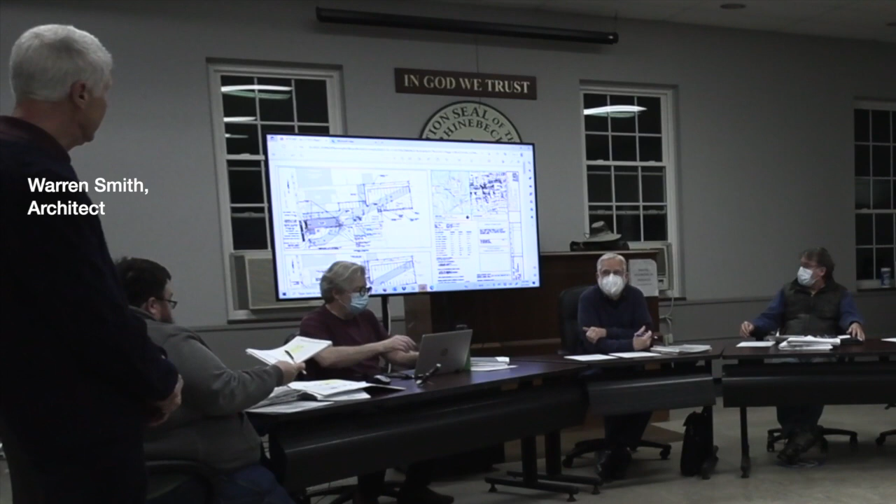But in general, this application for 6376 Mill Street, new construction, the building kind of across from the post office. Right now it's a vacant lot. Well, it's mostly vacant. There's a Chamber of Commerce little building right on the edge of it. But it's a lot with a lot of constraints. There are sewer easements for the village of Rhinebeck that run through. One I think is actively used. The other is an easement that may or may not be actively used. But nonetheless, we have to avoid constructing on top of those.

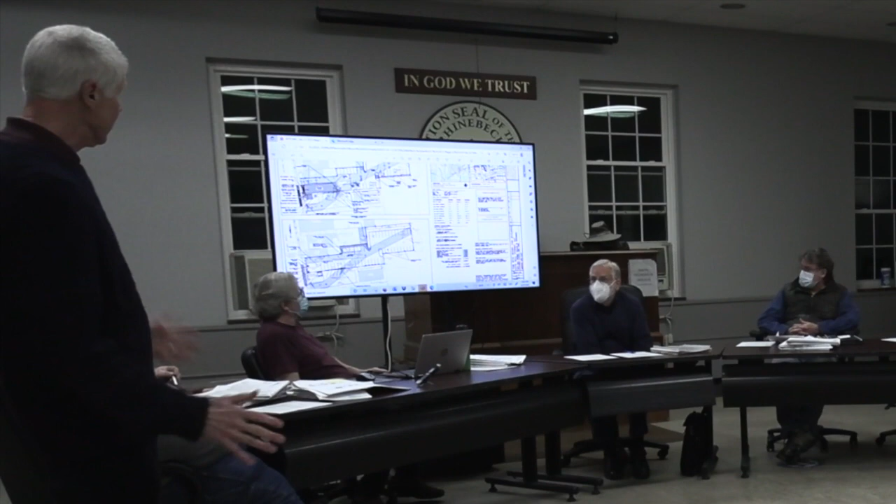So there's the shaded gray areas. It's a site that has the building that Frontier Communications has in the lower right there to the south. And just south of that is the Reformed Church and its cemetery. The site is low-lying. It's entirely parking, I guess, at this point, with the exception of the Chamber of Commerce kiosk. And it tends to collect a lot of water from neighboring properties. Some of it flows from the church property. Some of it appears to flow from the CVS property, but it sort of coalesces in that area. And there's just poor drainage.

There is a storm sewer in the street. And I don't believe there's much of a direct connection there. In fact, I think there's a couple of existing dry wells that Christian Paggi, PE, will talk about. Our proposal is to radically improve the retention of stormwater and drainage in the site, but also to build a building there. So the last time we were before the planning board, which was maybe a couple of years ago, the proposal was to put a small hotel, a boutique hotel, with retail on the front, facing Route 9, right where the bus stop is, fairly small retail space, and then at the back, entrance to an accessible hotel unit on the ground floor, and then on the two upper floors, accessed via stairs only, additional hotel units for a total of 9 hotel rooms.

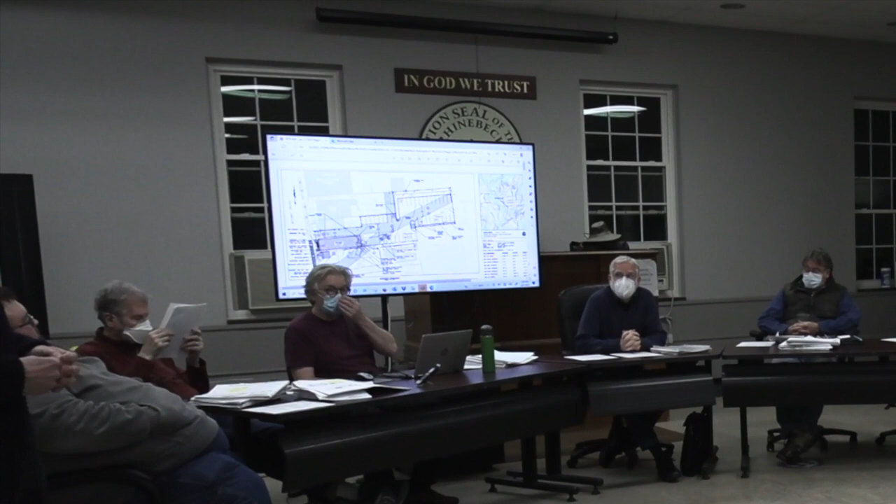The market for hotel rooms hasn't gone away, but the owners feel that apartments is a more critical demand here. And so the current proposal is to maintain, for the same footprint and the same basic design of the building, a retail area on the front, on Route 9, but to put in the back at the ground floor an accessible apartment, and then on the upper floors, 3 additional apartments, 2 on the second floor and 1 on the third floor, for a total of 4 apartments in the building. There's some minor adjustments to the window fenestration on the north and south sides, but really no change to the front of the building. Very minor tweaks to the back of the building.

Shall I bring the elevations? Sure, yeah, I might as well show those. The bulk of the issues that we've been working with, actually for the past year and a half, have been stormwater management and what to do with all the water that collects on the site. And again, Christian's been working very closely with the village consulting engineer, Tighe and Bond, to get that resolved.

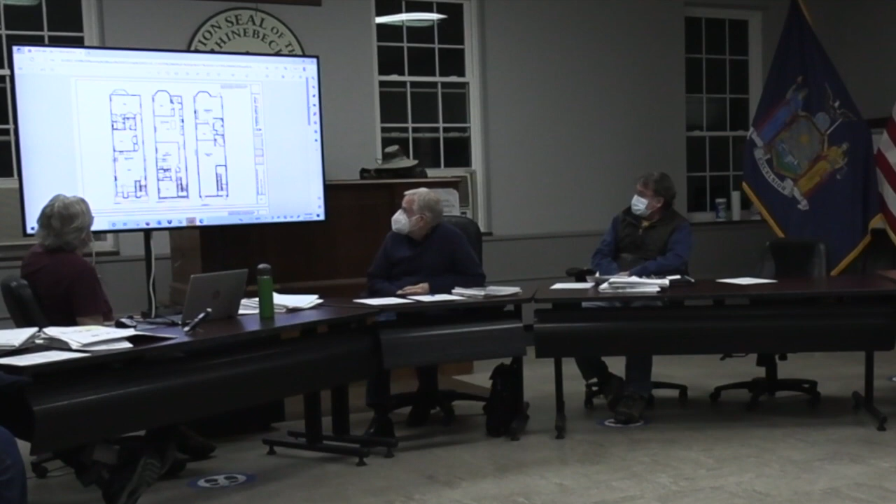These are floor plans for the building. On the right-hand side is the first floor, where there's an entrance to the retail space on the left and an entrance to a stair that goes up to the apartments on the right. The second floor has, again, 2 apartments, and the top floor has one 2-bedroom apartment. So that's within the footprint of the building as designed and approved a couple of years ago. Elevations are on the succeeding pages. That's the site plan again.

The elevations are in a different file. Oh, they're in a different file. They're in the file that had the plans and the floor plans. Amended site plan apartments says site plan. That's the letter. That's engineering details. There, okay, so if you just go down on that page, you were there. Oh, I was there? Okay. Yeah, it's just following pages in that same file. No, it's over the apartment set.

There you go. Okay, so yes, on the right is the street elevation, basically facing west, although the new one, did I send that to you, Ryan? Mm-hmm. The hub should have disappeared, and there's notes on there about the materials, which was a request at the last planning board. So this is not the most current file, but the building looks essentially the same. We pulled the double windows apart a little bit, which was a discussion in the last meeting. We relocated the grill for the PTAC unit for the top apartment on the right. But for the most part, it looks the same, except it's not being called the hub anymore, since its sign is not part of the application.

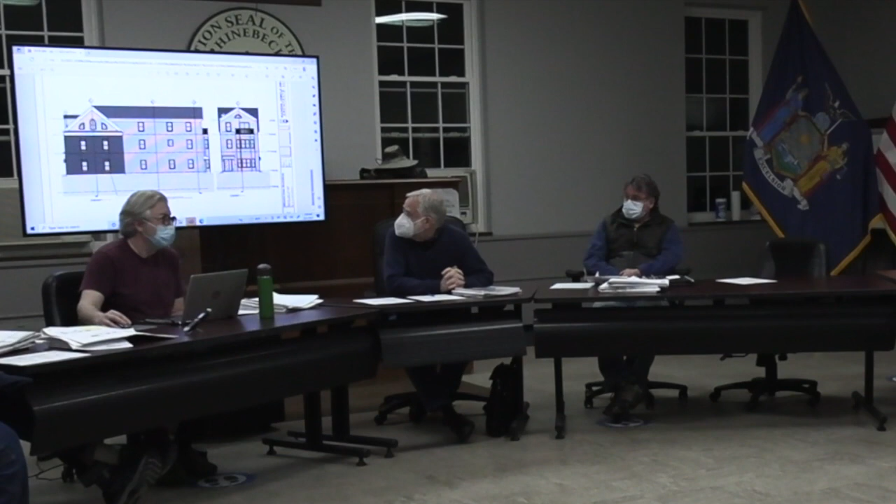If there are any questions about the design, there are some renderings too, which date from the previous iteration, but essentially are unchanged. But that's the substance of the architecture, and again, the site plan is simply changing it from hotel units to apartments. Do you have the renderings? Because that might be easier for people to understand. That might be in a different file. Different file. Was it in a prior meeting? No, they came in. Let me see. Did you have the renderings in the meeting of the 17th? We looked at them in that meeting. Okay, let's see. Apartment set, maybe.

Okay, yes, further down, that had some images. Again, that's the earlier plan set, but there is the rendering of the building from the street when it was still being planned for a hotel, but it's going to look almost entirely identical from the street, only the entrance on the right will be to the apartments rather than to the hotel upstairs. And that's a view looking up from the south, with the Chamber of Commerce building moved very slightly off the property line, so it can remain basically in place.

So, do you want to go over the engineering before we have public comments? Yeah, sure. Good evening, I'm Christian Paggi. Thank you, Warren. He pretty much covered most of the site plan elements. I'll run through the rest of them and some of the engineering. If you could pull the site plan up. Site plan? Yes, please. Just the application. No, that's not. So, again, the site plan is pretty much identical to the previously approved site plan.

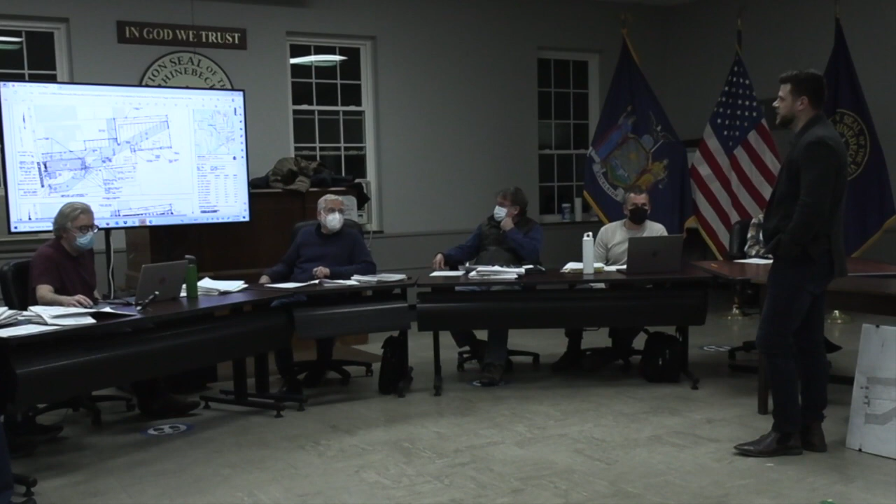We are also formalizing some of the parking stalls and bringing the stalls up to code as far as dimensions, and providing some new curbing to kind of straighten up and round off some of the existing edge of pavement. So if you're looking at the existing conditions plan compared to the proposed, you'll see that we're just adding a little bit of impervious in some of the areas just to formalize some of these parking areas that exist along that northerly side.

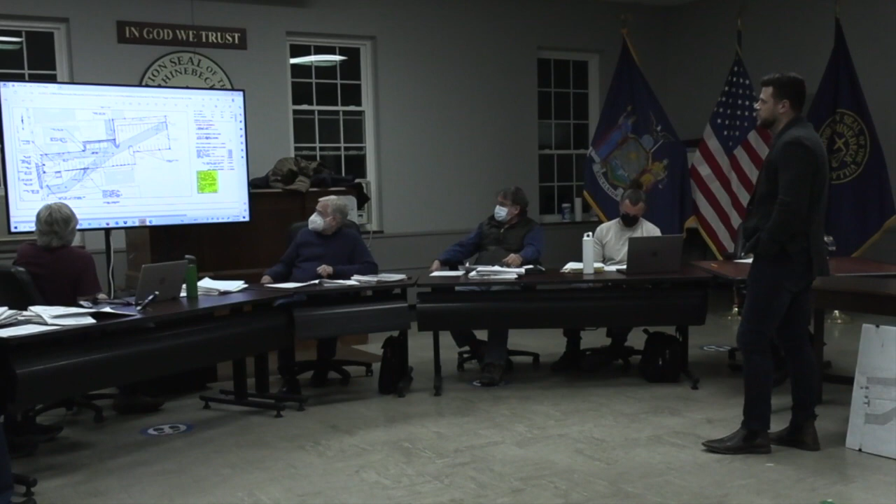As Warren mentioned, this gray shaded area shows the existing village sewer easement. That has dictated the location of the building as well as the stormwater improvements. If you want to go to the next, I believe sheet 3. One more. There we go. We are showing our proposed drainage, water, and sewer.

The building is proposed to be connected to the existing village sewer main that is located in that southerly easement area. The purple line is showing the building sewer line coming out to a new manhole and then connecting to the village sewer main. That will either be via a stub that's tapped into the sewer main. Tighe and Bond in their latest memo indicated they would prefer a doghouse manhole at that location, which is not a problem. Christian, is this the sewer? Yes, the purple area. Okay.

The blue line is the water. The water service, correct. And the water service is proposed just to be connected to an existing service stub. We met out there with the water department to verify that property is currently served by water. They believe it is, but we'll have to verify that also in the field.

Going to the drainage, the entire building is proposed to be collected via the roof leaders. You could stay back on that same one. We will likely collect the roof leader discharge with a manifold pipe around the building, and then discharge to that proposed catch basin 3, which is right in the center, and then direct all of that runoff to the rear. The rear of the lot currently experiences quite a bit of flooding, and that was referenced by Warren when he was walking through the site plan.

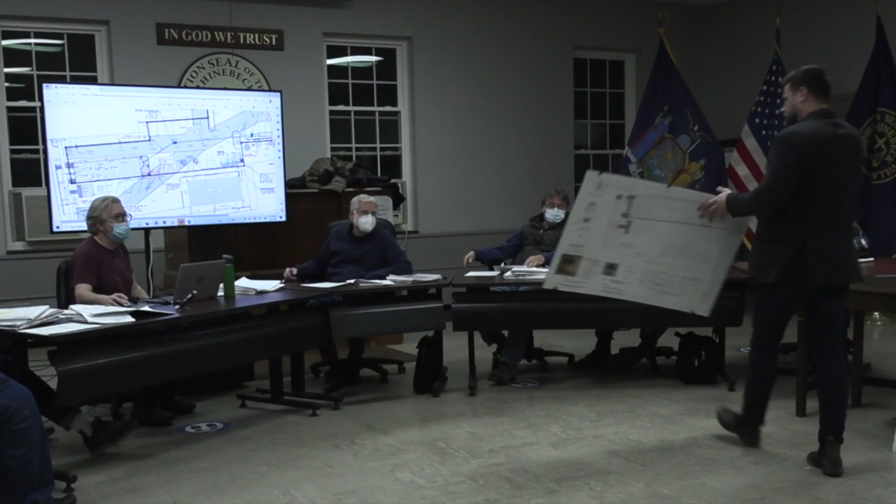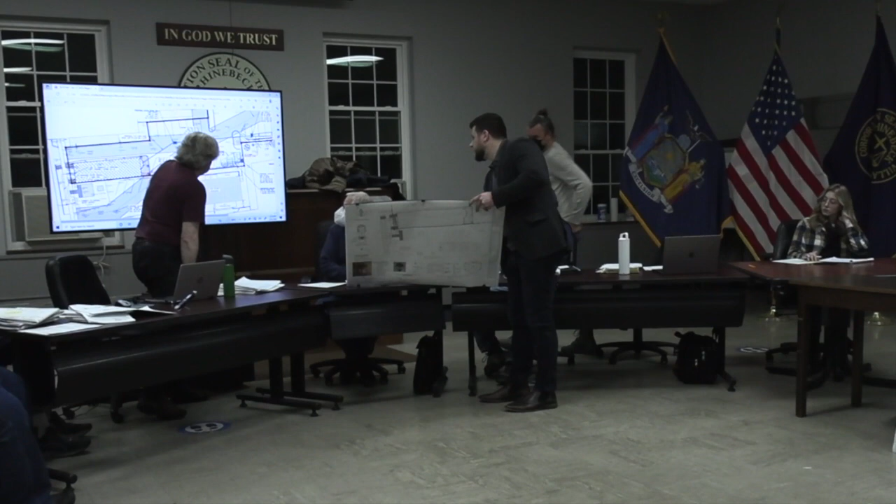We're proposing quite a bit of subsurface Cultec chambers to mitigate that existing flooding. The last time we were here, we mentioned that the size of that Cultec system is limited by the proximity to the existing sewer line. I don't think you can see it here. Is this the old plan? Yeah, this is the old plan. Well, I have this. So I tried to show this. This is a 25-foot offset from the existing sewer main. It's not shown on that plan. We showed it on the new revised plan, just to demonstrate how close we're getting to that line and the limits that we really are working with.

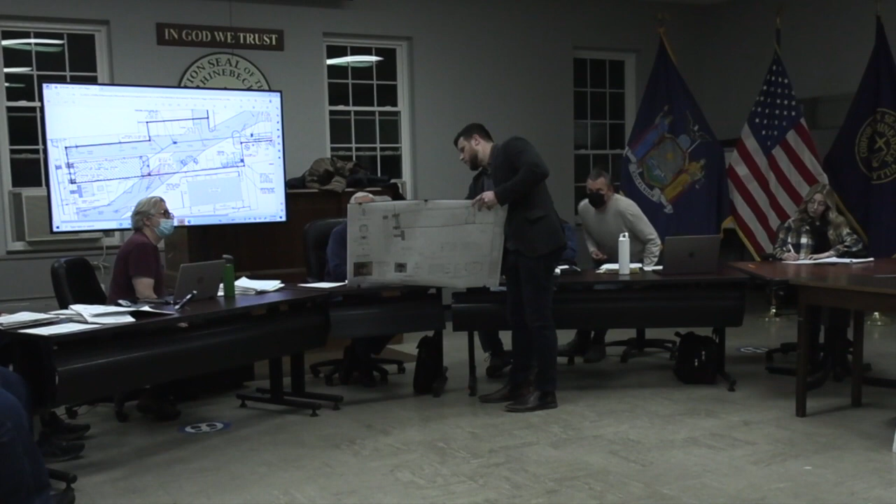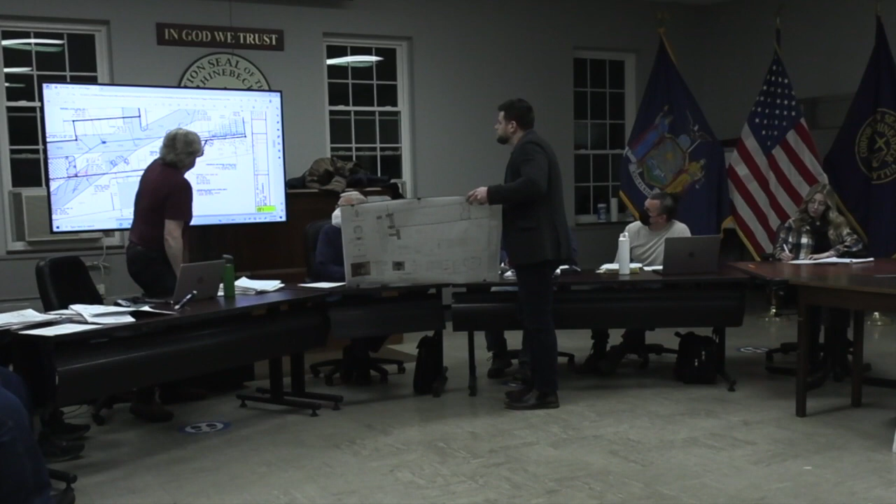So after we revisited that, we were able to add 2.5 more units, and each one of these little boxes is a unit. So we were able to add 1.5 units over here and 1 unit here, just by kind of shifting things around and squeezing it in. So not a huge increase, but I think we'll take whatever we can get. So this is the area you added the units in? Correct. Right here. Both of them, yes. And this is the offset? Right. Okay.

Originally we were able to capture and infiltrate the 1 and 2 year storm for the smaller westerly section, but for the larger easterly section, we were able to capture up to the 100-year storm. So by increasing the size by 2.5, we were able to capture and infiltrate up to the 10-year storm for that westerly system, the smaller system, and almost the entire 100-year storm with the easterly system.

One of Tighe and Bond's comments from their original review was to model it with a more conservative void ratio for the stone bed. So basically just lowered the amount of available storage in the model. That basically brought us back to where we started. So it was kind of a wash, but we are adding 2.5 units and additional stone. The model shows that westerly system capturing and infiltrating up to the 1 and 2 year storm, and similar to the first go around, the easterly system was capturing up to the 100-year, but not including. In our letter, we referenced that the model also is based on a very conservative infiltration rate of 10 minutes per inch of percolation or infiltration.

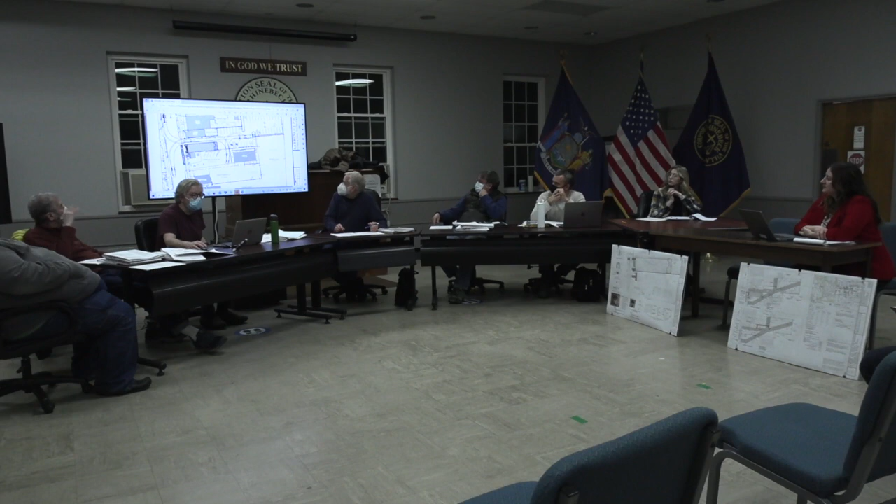So you would envision that I'm leaving my apartment with a bag of garbage, I would cross the parking lot and put it in the dumpster. There's no cans in the property itself. No, that's what the current commercial tenants in the telephone building do. And they bring their household garbage as well, so we get everyone's. That's a good idea for closure, right? Yeah.

Can I have a motion to close the public hearing? I'll make a motion to close the public hearing. I'll second that. All those in favor? Aye. So where do we stand in SEQR on this? We needed an amended SEQR or no? We requested that you reaffirm the prior SEQR determination that you adopted, since the usage is less than what was proposed for the hotel use. There'll be fewer people on the property, fewer cars. Everybody okay with that? Yeah.

Okay, we'll do that. So it would be a motion to reaffirm the negative declaration adopted on December 15th, 2020. Do I have such a motion? I'll make that motion. All those in favor? Aye. Did anyone second that? Jeff says second. After the fact, sorry. I'll second the motion. All those in favor? Aye. All right, so we got that out of the way.

Do we want to move forward on this on conditions that the engineer is satisfied, or wait a couple weeks until we get the sign off from an engineer? So the only things that are left are minor details, with the exception of that one comment that they didn't provide a response to. And if I can explain to the board why I believe that it's clearly showing an improvement to stormwater. The comment that they had is really kind of a checklist item that they're going through a SWPPP, and they don't see a pre-construction analysis versus a post-construction analysis, which is typical.

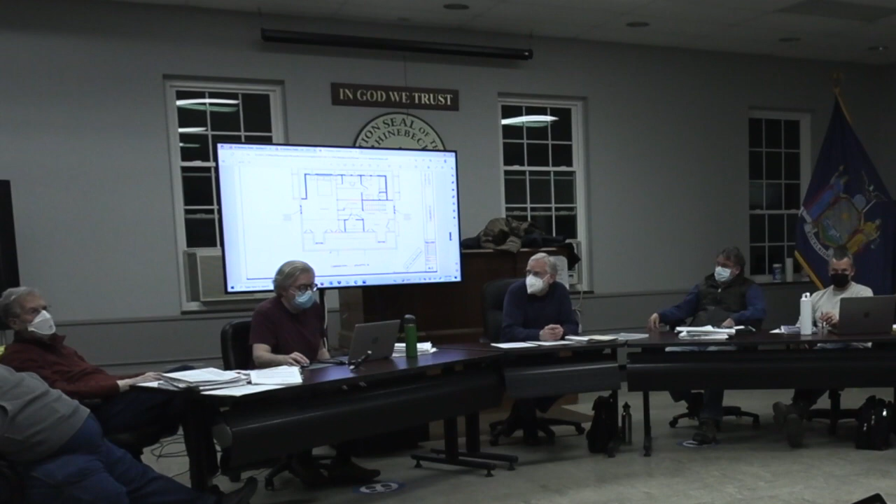And even on buildings in the historic district, people have come and said, I want to bump out, you can't see it from the street, a bedroom because I'm old and I can't get up there. Or I want to bump out a kitchen and dining room, you can't see it from the street. Even on historic buildings, we've allowed that. This is not even a historic building in the historic district, which we have no say over. So I don't think that this is a problem. I don't think so at all.

Also, there's some relief. So in other words, the shed is not going from end to end. There's relief here, right? That brings it in, which makes it not look like a slapped-on addition. And we can see in the proposed plan, this is the outline of the rear. Is that correct, Huck? That's the thermal envelope, yeah. This is the outline of the rear addition? Yes. Okay.

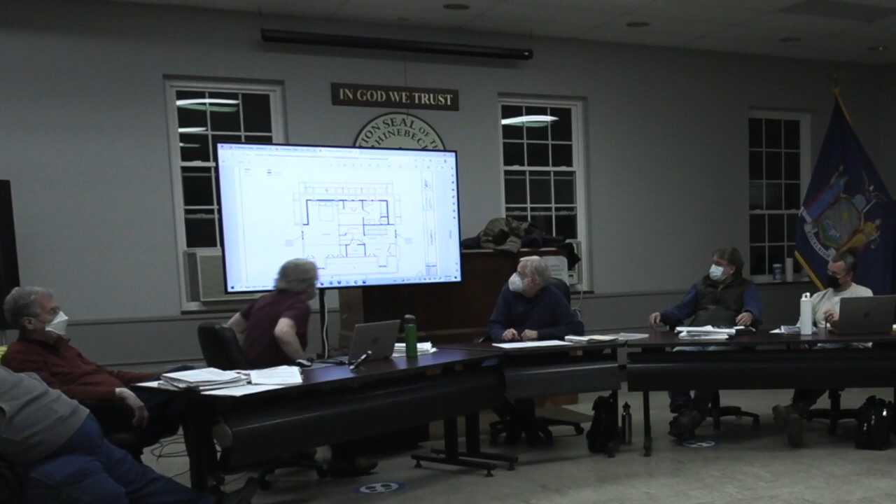So is that the consensus for you guys, Mike and Dan? I don't see any issue. All right, then we just need to have Jordan or Larry submit a building permit application and construction plans. Okay.

Sorry I had to wait so long. He loves to sit through meetings.

Can we go back to that one? They demolished a house across the street though, right? From theirs. That was before the law was in place. That was 2018, 2019, a couple of years ago, pre-COVID. And they demolished it because we didn't get this ruling about it, and it's in the new historic district, but not yet, so we have no say. They could build another black house with picture windows on the vacant lot. They tore that down in 2019, and Neil Larson didn't finish until 2020 or 2021. It wasn't passed by the federal government. It was submitted, it wasn't passed yet.

It was a complete disaster though, the Arnold House. It was really awful, it was in bad shape. He probably could have gotten demolition. Of the three that have been granted, two of them were falling down, but all the permits that were granted, except the Bill Clark one, which is totally falling down, were 3-2 votes. So this one is gonna be the fourth vote in like 12 years, or more. In 2009 the law was passed, so that's 14 years.